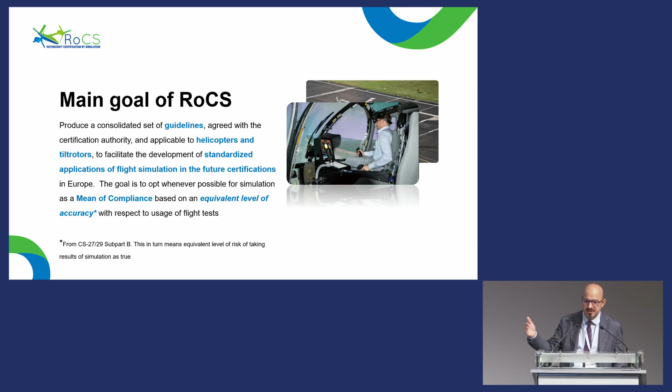What is the main hurdle? So I'm not going to go through the details. I guess we are already late, and there is the guideline, and I support your possibility to read the guidelines and see really what is included. So I will go through just some crucial points.

So the main hurdle is written here, in this sentence, and I really don't know who made this sentence, but I guess the majority of the people here, including myself probably, would agree with it. No one will believe in simulation, except the person who created it. Everyone believes the flight test data, except the person who measured it.

Okay? So we give high credibility to flight testing, because we have a long experience in flight testing, and also because we always think that flight testing is reality. But we all know that you can set up a wrong test using wrong instrumentation, using wrong procedures, and get to wrong results. Okay?

So credibility is not a matter of the system you use, but is really a matter of the procedures you use. So if you use the right procedures, you will have the right confidence that will provide you credibility. So if this is what we have done so far for flight testing, we need to start developing standard approaches to do the same using simulation.

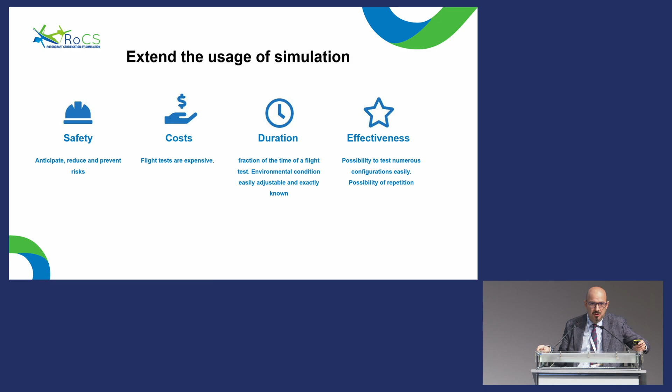Why we want to do this? Of course, we want to increase safety. We want to reduce costs. We want to reduce the duration of flight testing. Flight testing for certification is a very long process, and we want to increase effectiveness of flight testing. The precise control you can have in the flight condition in a simulator is something unachievable in a flight test. So this is an advantage that can give you a lot of points when you try to perform a certification test.

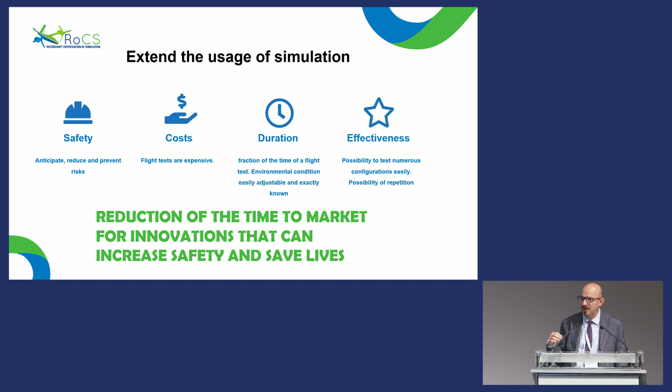So in the end, the goal is really the goal that Mr. Mueller was talking about before. So it's really the reduction of time to market to introduce innovations, because innovations will mean an increase of safety, and so in the end will mean to save lives. And this is probably all we need to do.

Those are the phases. So we developed the process, and the process is detailed in a document that is free and downloadable by everybody, that is called Guidelines for Certification by Simulation. As you go through the document, you will see that it is organized basically in 4 phases. You have an initial phase of project management, a second phase that is crucial, that is called requirement capturing. There is no one model that is good for all. You need to develop a simulation model that is specifically tailored on the requirements of what you're gonna do.

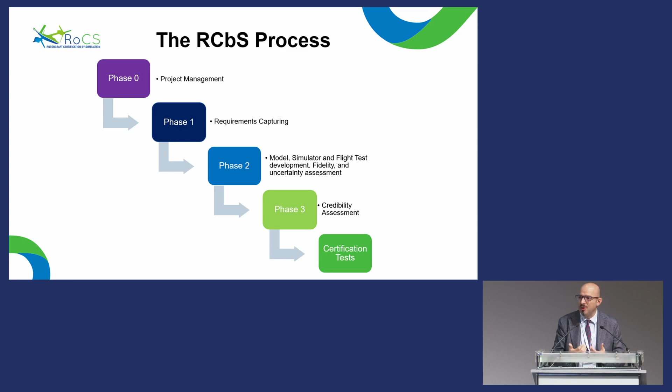The second phase is the phase where you really develop systems. So you develop your flight simulation model, you develop your flight simulator, and you develop also your flight test campaign that produces data that are necessary to validate the model and the flight simulator. And finally, the third phase is the assessment of credibility. You develop a model, you have to show that your model is credible. You have to show that your model has the quality that is good enough.

This is a more complex show of the same phases. This is here just to show all the details that are required. So I'm not going to go through all phases, of course, but I just want to tell you that phase 1 is crucial, and you see that the requirement capture is really at the center of this picture. But then phase 2 is composed of 3, let's say, building blocks. One is the validation, verification, and development of the flight simulation model. That is the yellow one.

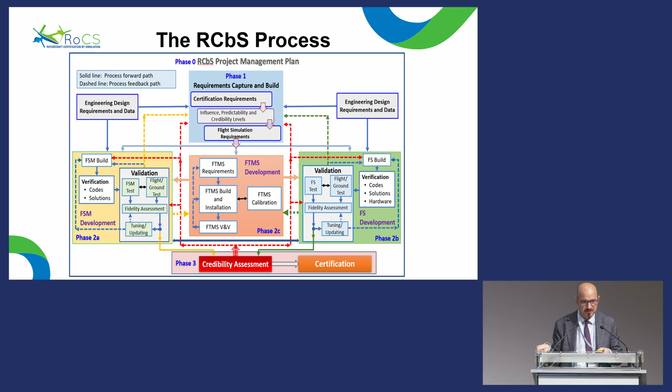The other one is really the development of the flight simulator, whenever the flight simulator is necessary, meaning whenever a piloting loop is required, and so to provide some cues to a pilot is required. And the third important element is the development, again, of the flight test campaign that will provide data to validate both the flight simulation model and the flight simulator. Then, with probably a lot of iterations between all those blocks, you will end up in performing your credibility assessment, and if the credibility assessment is fine, you will go into a certification.

So requirement capturing. Requirement capturing really starts by knowing what is the certification standard, what are the means of compliance, what are the design requirements, and out of this you will end up in setting a few crucial elements that will really influence the whole process: the influence level of the model, the structure and complexity of the flight simulator, the structure and complexity of the flight simulation model, the domain of validation, the flight test campaign that has to be performed, and the amount of extrapolation eventually to be used.

This will, in the end, end up in setting the complexity, the effort, the resources that are required, the cost, the expertise that you will need to go through the process, and the time required. So the requirement capturing phase is really the crucial part, because it's there where you set up if you're going to be able to reach the goal or not.

Influence level. First important element, you have to know from the beginning what is the level of influence of the decision taken by using the model. We define 4 different levels. The first one is called the de-risking, where you use simply the model to get accustomed with the certification phase that in the end is going to be performed fully by real flight test.

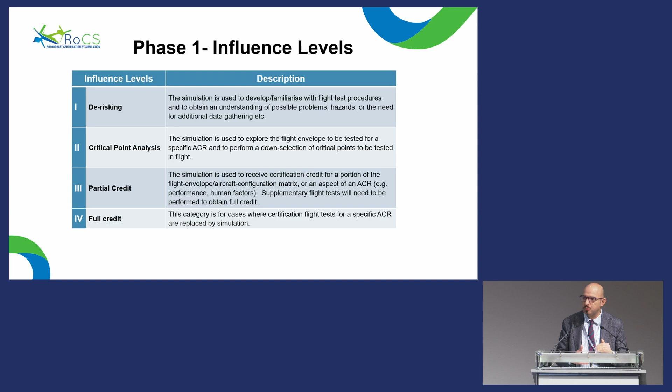Or you have a critical point analysis, where you use simulation to select some few critical conditions that have to be tested in flight. Partial credit, where you use flight simulation to get credits for some of the part of the ACR, or full credit, where the simulation is really substituting the flight testing. We understand that the higher is the influence level, the higher is the risk of using simulation. So we have to account for this increase of risk in the way we assess credibility.

The second important element to establish when you do your requirement capturing phase is the definition of the domains. The first domain that has to be really clear to the developer of models is what we call the domain of physical reality. You develop a model that is based on mathematics, is based on equations. The equations represent a certain part of the physics. We are not modeling everything. So we know what we are neglecting, and by knowing what we are neglecting, we know what areas of the flight envelope are represented in our model, and what areas are outside the capability of our model. This has to be always clear.

So the domain of validation has to be well within the domain of physical reality of the model, and the domain of validation is the domain of points that are flight tested to compare the flight model with the flight test. Then we have a domain of prediction, and the domain of prediction is the blue one, and is the domain where we're going to apply the certification by simulation.

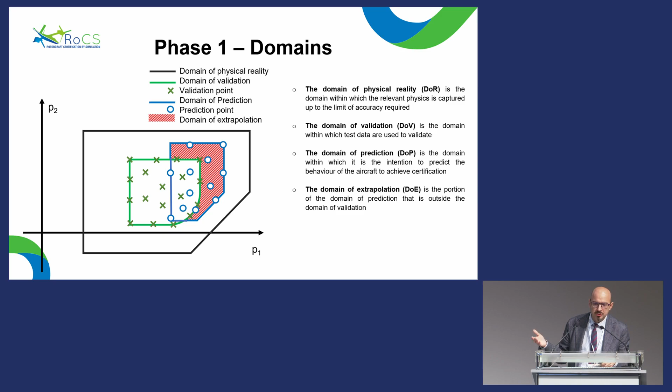So it may happen that the domain of prediction is well within the domain of validation, but it may happen that the domain of prediction has some portions that are outside the domain of validation. In this case, we are basically using the models, specifically physics-based models, to extrapolate. So the difference between the two will be called the domain of extrapolation. The knowledge of the domain will help us in understanding what is the predictability level of the models. So we defined also here 4 predictability levels.

A full interpolation, where you move your model within the domain of validation, an interpolation in the domain of validation, a limited extrapolation in the domain of extrapolation, P2, an extended extrapolation in the domain of extrapolation, P3, or a full extrapolation. We know that there are cases where we use simulation, for instance, in failure testing, for cases that cannot be flight tested. So those are full extrapolation cases. And so we need to take care about the high level of credibility that we need in order to perform this full extrapolation.

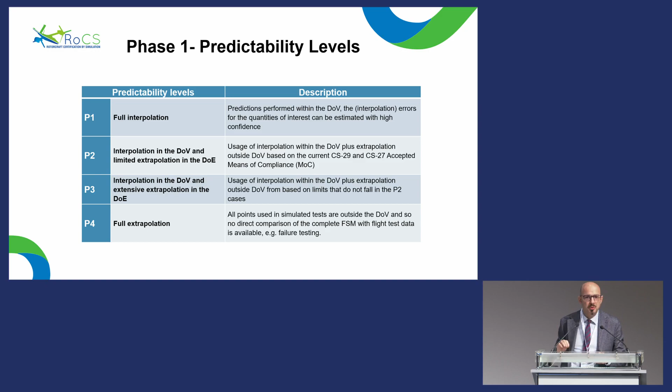So whenever you set up your level in terms of predictability level and influence level, you will end up in one of those boxes. And so you will have a clear understanding of what is the effort required, what is the complexity required, what is the validation required for your model. And so in the end, you can really plan your certification by simulation flight test campaign.

Models. I'm not going to dwell too much on models. In principle, models should be always built in a building block approach, so having different levels, going from the system level down to the individual parts. In principle, we should perform, for sure, validation at the system level, but if we want to use extrapolation and so go beyond the domain of validation, we need to perform some validation also at the subsystem levels.

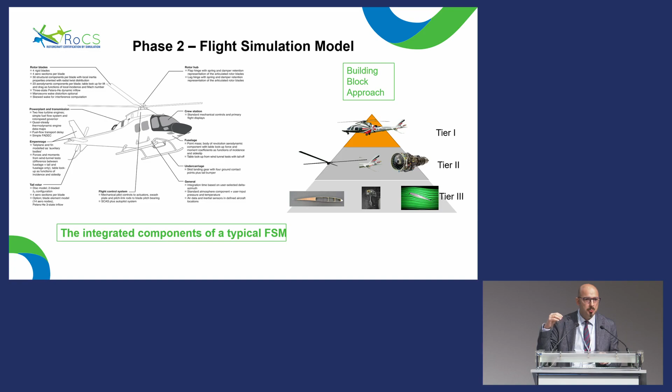How many levels and how to connect them is up to the objective. So there is no general rule, but this again has to be stated clearly when you set up the requirements, because this will have an impact on the possibility to use your model in one way or the other.

Verification and validation. Verification means: is the model solving the equations right? So it's something that is really related to software. Most of the time, we are not asking our software providers to provide verification, but this is a very important element.

Whenever you buy an instrument for flight testing, you want the provider of the instrument to provide you with data for the calibration of the model that has to show that the calibration has been performed in a certain condition, and so on. Why are we not doing the same for software producers? So we need to see that the models are correctly verified.

The second step, and this is something we really need to do, is validation. And validation is checking that we are solving the right equations, so that we are solving the right problem that represents reality. So in this case, the problem is really comparing the model with reality.

The comparison could be done at the experimental level, comparing with flight tests of the aircraft of interest, or by comparing the results with similar aircraft. In some cases, this is acceptable. It could be done comparing with more sophisticated numerical models that maybe cannot run in real time, or in some cases, even engineering judgment could be sufficient.

We have to keep in mind that we can never prove a model to be valid. So validation is really a matter of convincing and demonstrating to your peers that your model doesn't have invalid elements. So this is crucial. You can keep going in validation if you keep continuing, so you need to set a stop. And to set a stop, what is really crucial is to understand how to scale the errors.

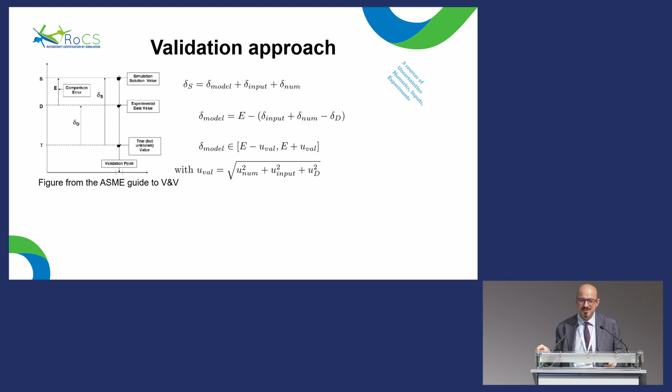So I'm not going to go through mathematics, but really what you may understand is that the error, that is the difference between an experimental measured value that is affected by error and a numerical simulation value that is affected by error, has to be bounded by the uncertainty of your model. And the uncertainty of your model is defined by the uncertainty of the numerical algorithm that you're using, by the uncertainty of the input data, how precise the data you're using are, and by the uncertainty of the experimental data, because they are also affected by uncertainty.

So putting together these uncertainties, we will end up having a scale that is not general, but case by case, that will give us a way to compare the error with the uncertainty. So if the error is much larger than the uncertainty, there is something wrong in our model, so we need to improve the models.

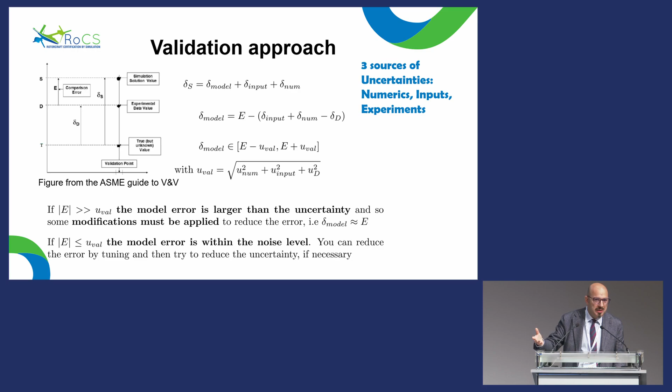If the error is comparable with the uncertainty, then we reach the goal. We have a sufficient level. We don't need to go over that because we don't have the data. We don't have the model. We don't have the equations to do better. So we will keep rotating around an element that we cannot really improve.

So this has to be done on the flight simulation model, but of course the same process has to be followed also on the flight simulator, and so on what is required to give cues to the pilot. Again, here it is important to understand what the relevant cues for each maneuver are, and just develop a simulator that is able to provide those cues, keeping in mind that here the objective is not training. The objective is really to put the pilot into a condition where he can perform the flight exactly, or as much as possible exactly, as he will in flight.

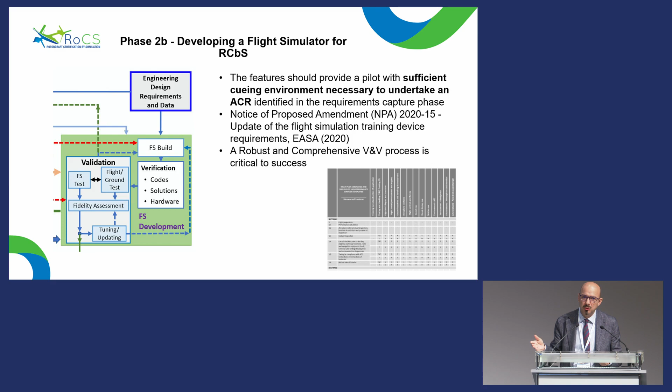So in some cases, we can provide cues in a different way, because again, it's not training, but that goes through the same perception, and this can give the pilot the right way of performing the maneuver, and so assess the performances. That is the objective. On the flight test, I have already talked, so I will not bother you about the importance of developing a flight test campaign that has to be tailored for model development.

The last point is credibility. So how we assess credibility and what is important. We decided to use the confidence ratio as a method to assess credibility. That is the ratio between the distance between the simulation model and the performance requirement that is set by the standard, and the uncertainty.

So the minimum you want to have is that the margin between the simulation and the performance requirement is larger than the uncertainty. Okay? So the confidence ratio has to be at minimum larger than 1, and this will give us a low confidence. If you set a higher level, then you can increase your model from a low confidence model into a medium confidence model, or maybe a high confidence model, or a very high confidence model.

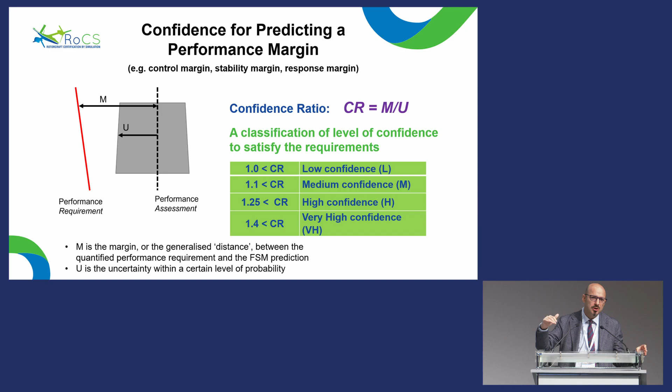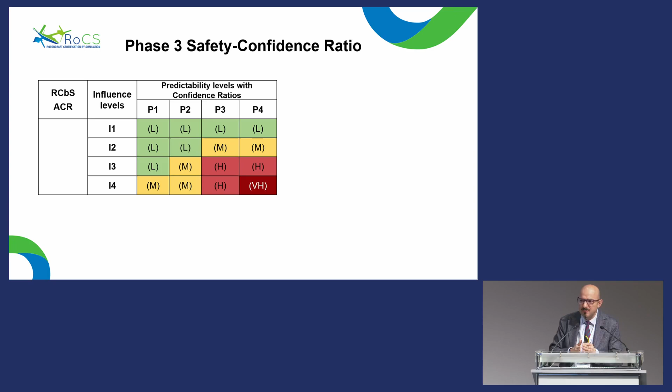So those levels could be set in our matrix where we have predictability and influence level to set the minimum requirement in terms of credibility, and so in terms of confidence ratio that has to be assured by each model. So if we're going to use interpolation for de-risking, probably a low confidence is sufficient. But if we're going to use full extrapolation for full credit, probably we need a very high confidence. It means that we cannot have a model that shows results that are very close to the margin, because then we are hanging in the uncertainty band.

So if this is the performance requirement, remember that we need to take some margin to reduce the risk. So the higher is the risk, the higher has to be this margin. At the same time, we know that there are a lot of what we call unknown unknowns, human errors, wrong modeling of the physics. So the more you move rightward, the more you move into an extrapolation, the more could be the effect of those unknown unknowns. And so the higher has to be, again, another margin that we have to take to take into account the unknown unknowns.

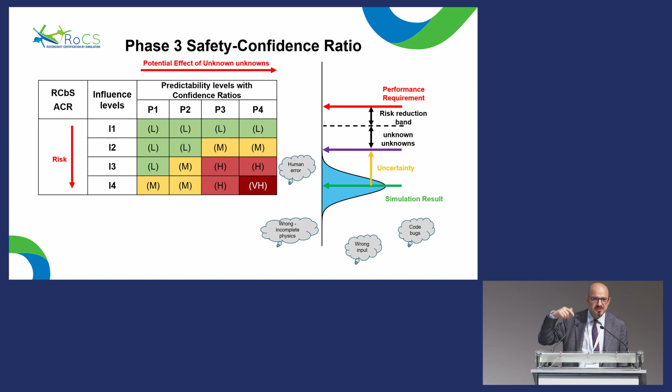This will mean that the real margin for us, the real performance requirement to be used in the model is not the red line, but is the purple line. So if this is the case, we need to show that our simulation result plus the uncertainty is within the limits, including the risk and unknown bands that we have to take. And those bands have to be larger and larger, the higher is the risk. Okay.

So in the end, will Rotorcraft certification by simulation be a piece of cake? Of course, no. Okay. Initial application probably will require a significant investment and may not fully pay back in the short term, especially for OEMs that have a long tradition and experience in flight testing. There are a lot of systems, procedures, methods, expertise to develop. However, we all have to keep in mind that helicopters are long life cycle programs, and we believe that the application of Rotorcraft certification by simulation will be rewarding in the long run.